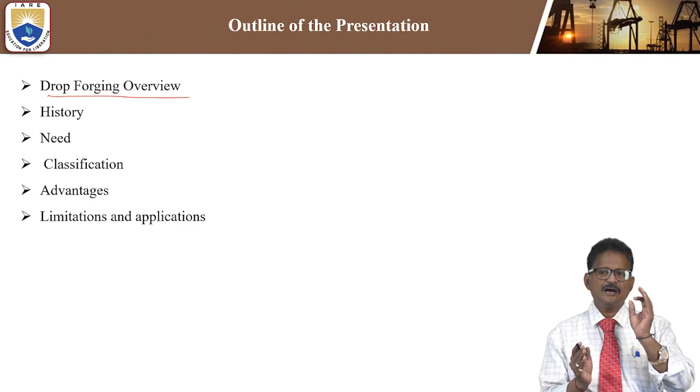So look at this outline of the presentation. Mainly I'm going to discuss the drop forging overview. Forging is a technique of metal forming where 100% of raw material can be effectively utilized. There is no wastage of material - the wastage is very negligible, almost zero.

Drop forging comes under either hot forging or cold forging. There are a variety of processes: hand forging process, machine forging, and drop forging. I'm going to give a complete outline of drop forging.

What is the history of drop forging? What is the need for going for drop forging? Especially components like spanners, adjustable wrenches, and connecting rods - all these are made using this drop forging technique.

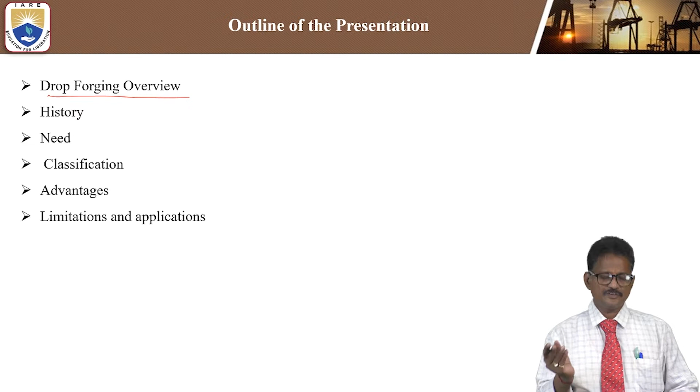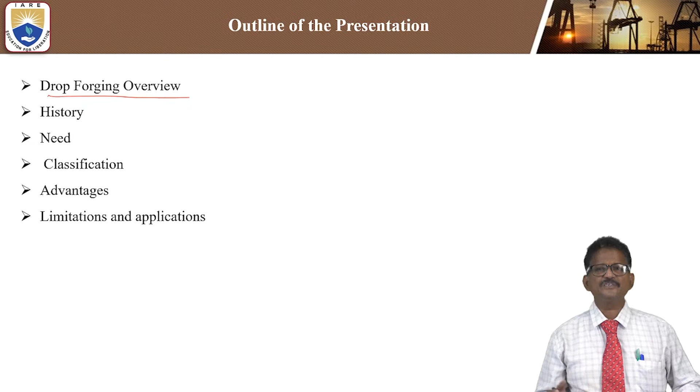Even though it is a traditional process, some advanced techniques have been introduced. Coming to the classification of drop forging - manually, semi-automatic, or fully automatic - and how you can produce components like spanners, adjustable wrenches, and screwdrivers. We'll discuss advantages, limitations, and applications in detail one by one.

Let us see the basic introduction of drop forging. Students can focus on how this drop forging process is done, what are the different parts, names of parts used, what type of machine - presses - and how much tonnage of presses can be introduced here, and how to perform this process with good quality. We will discuss all these things in detail.

In general, the term drop forging can be defined as the process of shaping the metal and increasing its strength by performing dropping of the machines. Through dropping of machines, we transform and change the shape and size. So drop forging is a process of shaping metal and increasing its strength. Almost all ferrous and some non-ferrous metals are widely used for drop forging.

In most cases of forging, let us discuss important terminology one by one. There will be one upper die, and it is forced against a heated workpiece positioned on a stationary or lower die. Above the stationary or lower die, we can keep the workpiece.

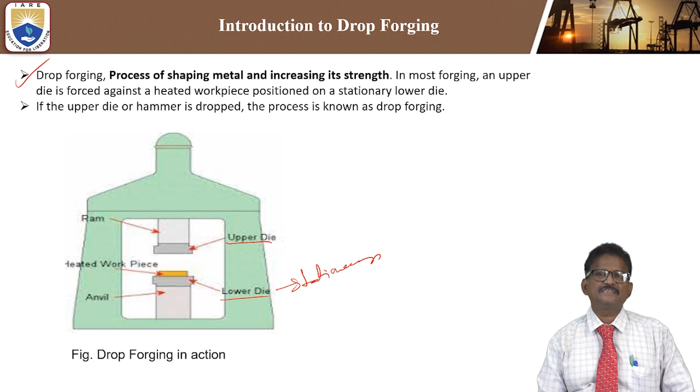Coming to the forging hammer, this is similar to the earlier one - there is a ram, and the linear guide will impact suddenly on the ram.

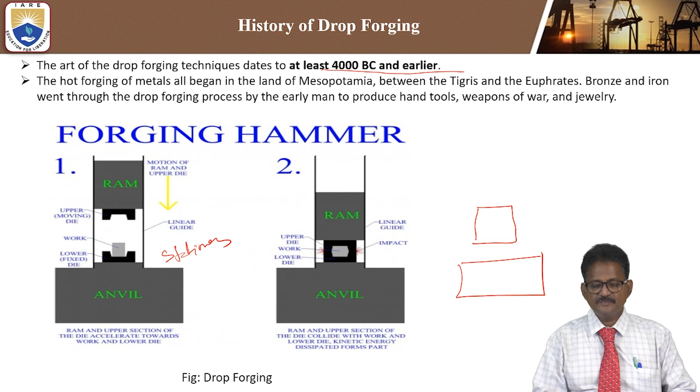Obviously, the upper die works with the lower die. This is a simple manufacturing process where you can perform better. High capacity or high tonnage components can be produced by this drop forging technique.

It is a manufacturing or forging process whereby a hammer is lifted and then dropped onto a heated piece of metal to reshape it into the shape of the die or tool. The preheating of the metal softens it, and the structure of the metal can be improved better.

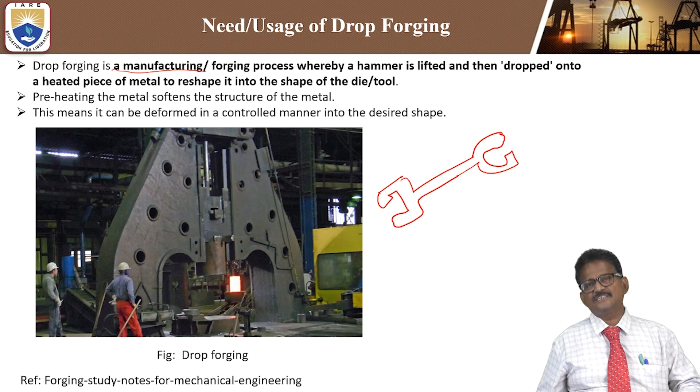This means it can be deformed in a controlled manner into the desired shape. So this is about the need and usage of drop forging. Now look at these few classifications of drop forging.

Whenever someone asks what is the forging technique, you need to have some small opening or die that can be rotated, and you can perform better using cold forging, open die forging, and seamless rolled ring forging - that is seamless rolled ring forging, hot forging process, open die forging, and closed die forging.

Open die and closed die - when you want exact dimensions without air gap, you go for closed die forging, and similarly cold forging and radial forging. Radial means when you draw a line radially, performing together to have a good impact on this classification of the drop forging process.

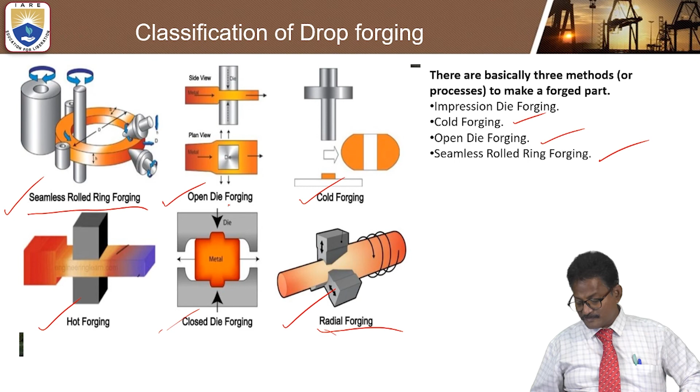So these are some advantages of drop forging. Drop forging advantage: production efficiency is very high. Complex shapes and distribution of the metal flow line is more important.

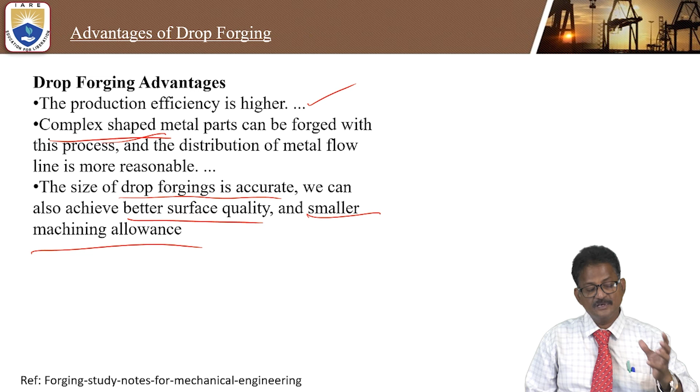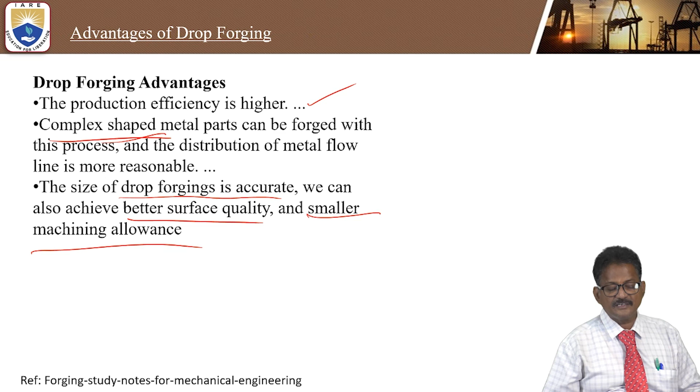The size of the drop forging is accurate, and we can achieve better surface quality and smaller machining allowances. I have already studied allowances in detail - all metals shrink except bismuth. So obviously it cannot be removed, and wherever the size of the drop forging is accurate, we can achieve better surface quality and smaller machining allowance.

These are some active applications of the drop forging technique. Thank you students, I hope you understand clearly about drop forging - the important uses of drop forging, and how components like the spanner and adjustable wrench can be made using this process. Thank you very much for your patience and studying the subject.

Now another topic is roll forging. What is meant by roll forging?